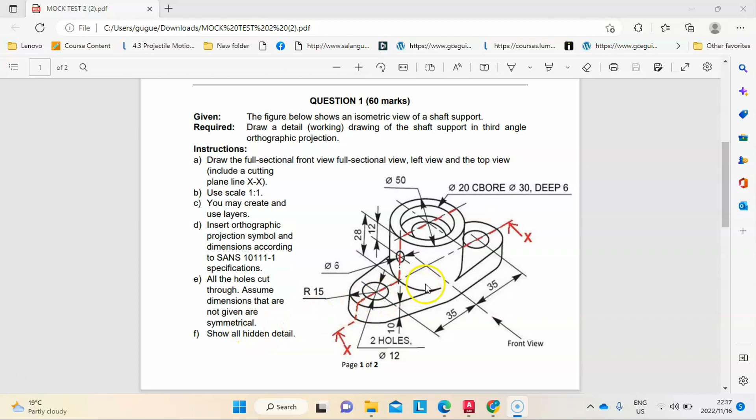Show all hidden details. So this is the question, guys. I want to put this to third angle orthographic, and I'm going to start by drawing the full section of the front view. Remember, when we draw a full section, we remove this front part here and then view what's remaining.

If we were to cut with a knife, an axe, or a saw, where we have material we would see a cut. Where we have a circle, we have an empty space, we have air basically, so we won't have a cut. Same on the other side, we only see cuts on the sides of those circles because that's where we actually have material. Where we have holes, we don't have material. Even there, it's the same.

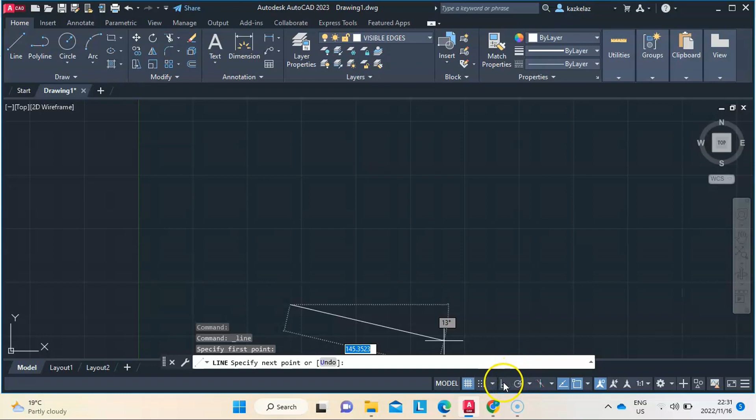So yeah, let's get to it. I hope you are looking at the drawing. I'm going to set this to orthogonal restriction, which allows me to draw lines that are only horizontal and vertical, nothing else. So here I'll put it 25. I'll explain why once this part is complete. Here I'll put it 28.

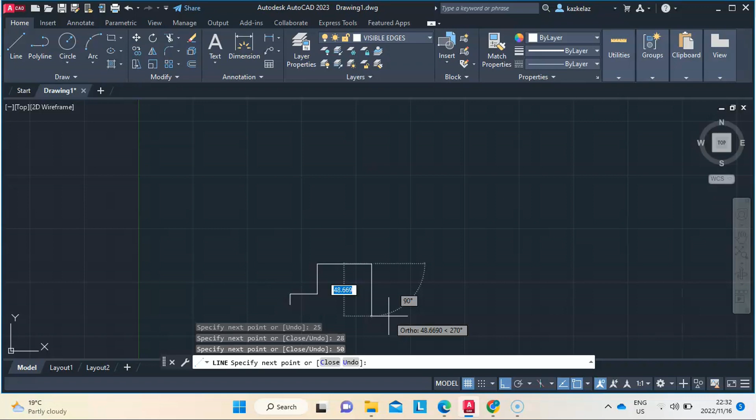Here I'll put 50, I'm sure you know why we have a 50 there, that's the diameter of the big circle. Then we have a 28, then we have a 25, and then we have a 10. And then you can see that this will be 100.

So yeah, I put 25 here because I know that the full length of the drawing is 100. Let's just verify that, guys, let's just verify that part. I just want to make sure that is the same as the other side.

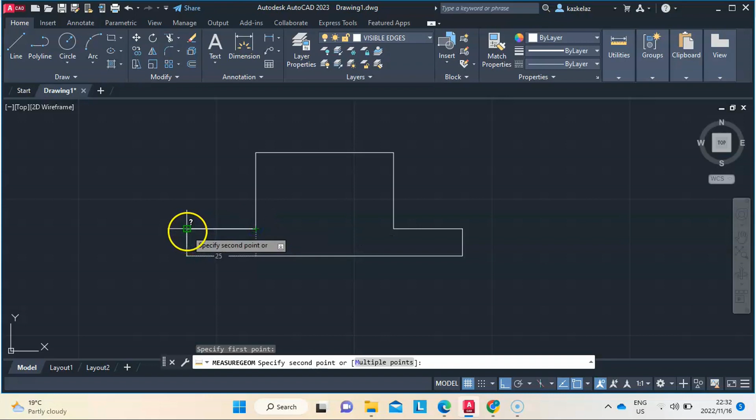Okay, so I put a 25 here and a 25 there because I know this is a 50, so I need a 25 on that side and a 25 on that side to make 100. So that's the reason.

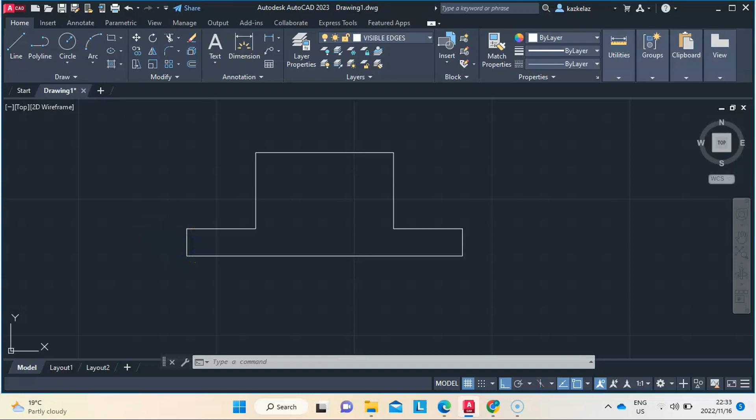I also know that from this point I can offset that line by 9 millimeters. Why? That's the first edge of the circle.

Wait and see. I'm saying this is one of the edges of those holes that we have here, the edge that is closer to the outer edge of the drawing. So I put it at 9 because I know that from that edge to the center, it's 15.

Since we have that arc with radius 15, it shares the same center with these holes, I have to subtract the radius of this circle, which is 6 millimeters, for me to get to this edge. And I have to go from this edge.

I know they're separated by 12 because two points that are opposite to each other on the circumference of a circle, if they can be joined by a line passing through the center, that length is equal to the diameter. So that's what I just used there.

And then we can go to annotate, go to center line, select first line, select second line. You see you have your center line there.

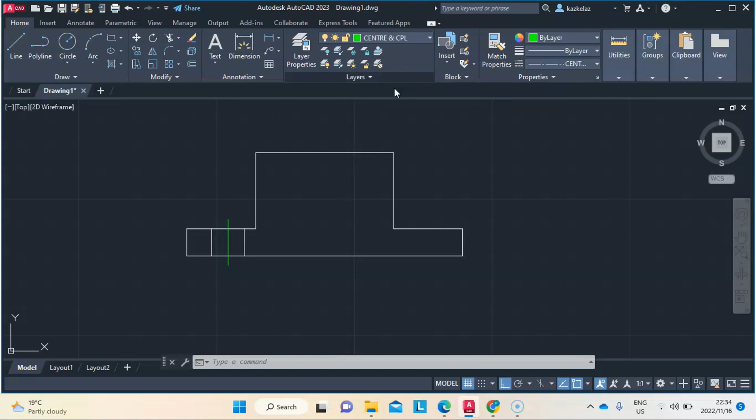Let's change its color. We go and select the layer that we created for that. Then right click, go to properties, then go to line type scale and change it maybe to 0.5, because we can see that it was appearing as if it's a solid line.

It's actually supposed to appear like that because that's a center line. So when you create your layers, you have to choose your line type as a center line. There are many center lines: center times 5, center 2, center times 2, center. You can choose whichever one you want.

So I don't need to draw this twice. I can just mirror it to the other side. Mirror line passes through the center of those circles.

And then I also know that from the top, I need to go down by how much? Let's start with this part. Once it says endpoint, we start dragging our mouse without clicking. We type 10.

We know this 10, we know where it's coming from - the distance between the outer circle and the one that's just inside. Then we go down by a depth of 6. Then we go to that side by 5 millimeters. Then we go down to the bottom of the drawing.

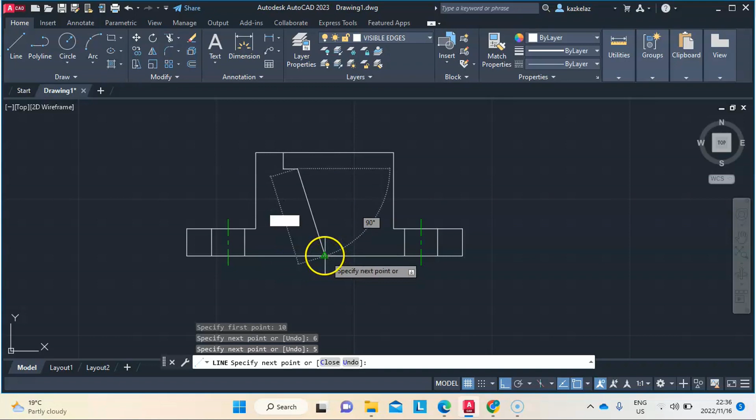Let's do that. And then here we can select that there, mirror it. We don't need to draw it again, so mirror it to that side. Erase source objects, we say no.

And then let's complete this part here. After completing that part, let's join this here, and that. Just type join out of nowhere in your AutoCAD, and you'll see that it's now one line.

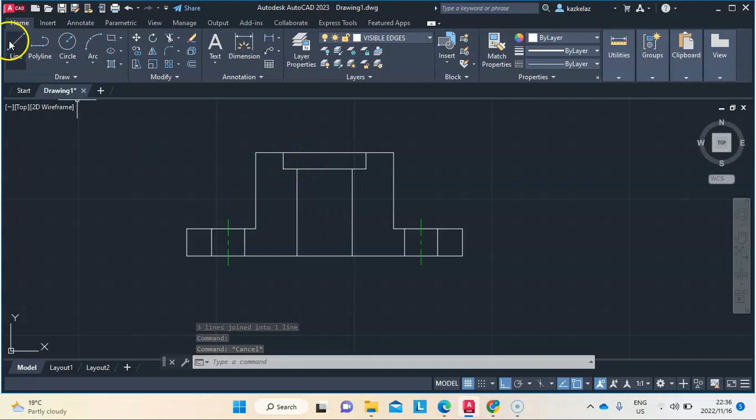So you have something like this here. We also know that from the top, we need to move by 12 to get to the center of that small circle that's somewhere there. But let's move by 9 because we know its radius is 3.

So we want the first edge. So we know it's 9 from the top, since the center is 12 from the top. And we'll have something like that.

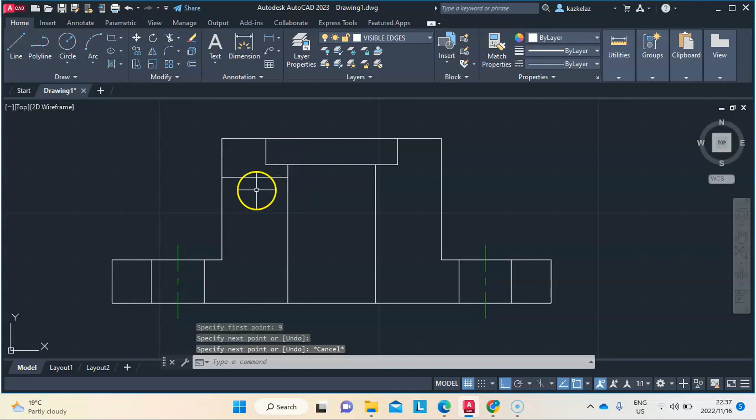Then let's offset that line by 6 millimeters, the diameter of that small circle. And we'll have something like this.

Let's now put its center line. So annotate, center line, select first line, select second line. We have something like that.

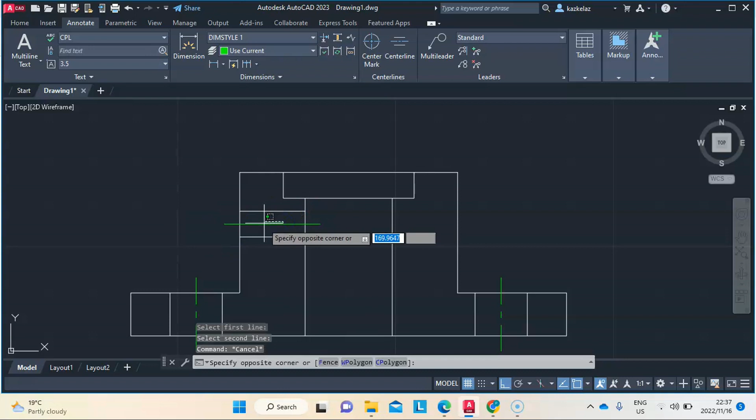Then what we can do from here is select that line, go to properties, go to line type scale, change it to 0.5, enter, and we have something like this. So now, I think that's it.

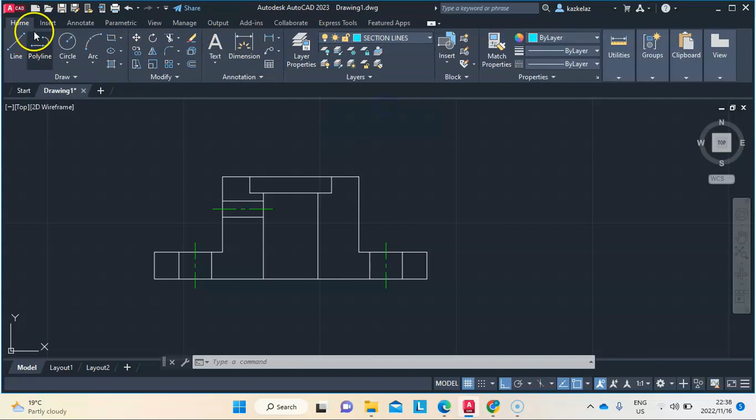What we now need to do is hatch that - go and select the hatch layer, the section lines layer. Then we go and select a suitable hatch pattern.

For full sectional views of machine components, I normally prefer using this one. I also recommend this one here, it's called ANSI 31. That's the one that I recommend. So you're going to have something like this here.

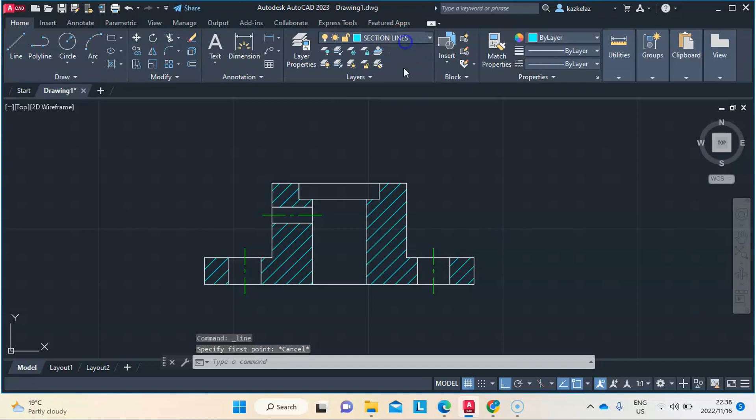Something like this, right? So after putting that, you also need a center line there. Let me show you guys, you need a center line there. So let me go down by 5 millimeters, and then there maybe by 50.

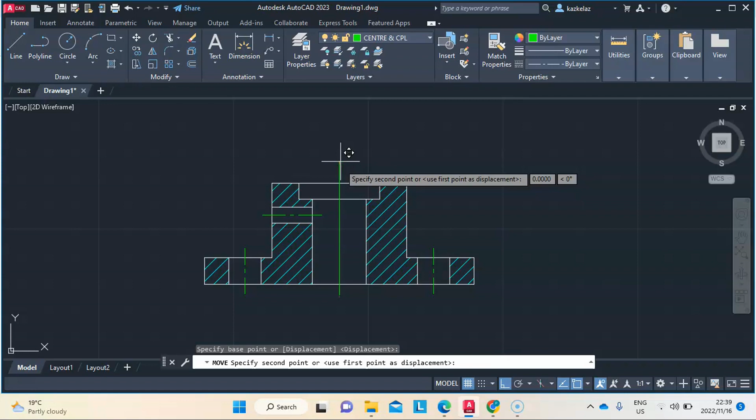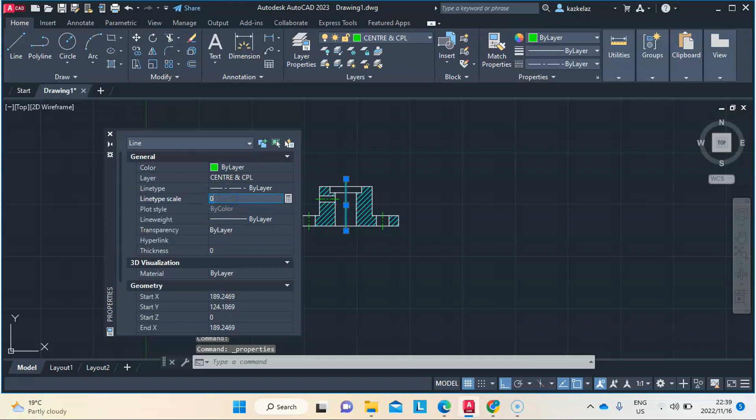Let's keep it where it is, but change its properties. Let's change its line type scale to 0.5. Okay, it doesn't change, so let's change it to something else, maybe 0.3. Yeah, I think that worked fine, so we have something like this.

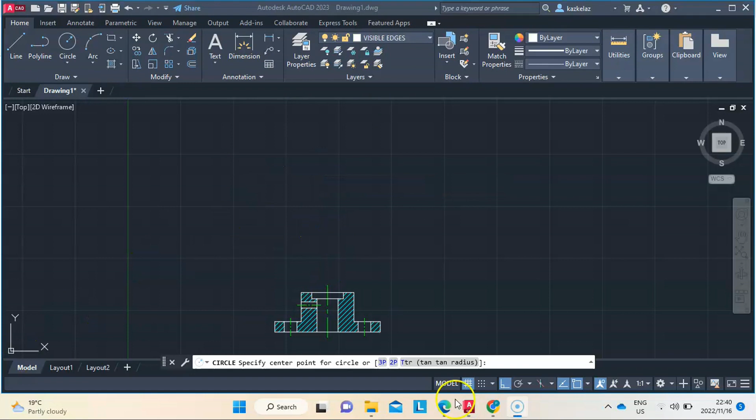After drawing that, let's go ahead and draw the top view. For the top view, we know we're going to have a circle. I've selected the visible edges layer because I know my circles are going to be appearing, since we're going to be seeing them from the top view.

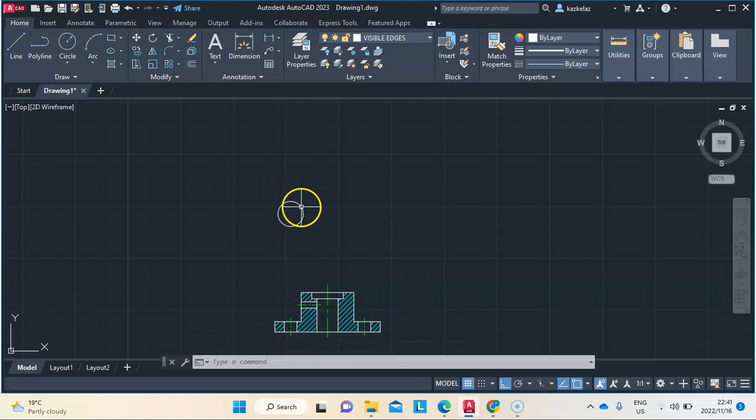Let's move up by maybe 100, and then from there, the small circle is 12 millimeters, and I know I have another one on the other side. So I'm going to mirror it about the center point. No, this isn't correct - the diameter is 12, the radius is 6.

So I'll move by 100, with a radius of 6. Then I'll mirror about that point, not erasing source objects. Then I select the circle again, then select that, and put this circle for the arc. Now I want to put the big circle that's in the center.

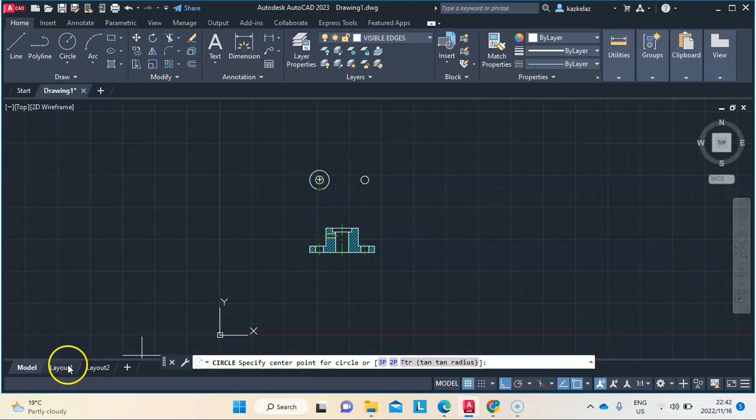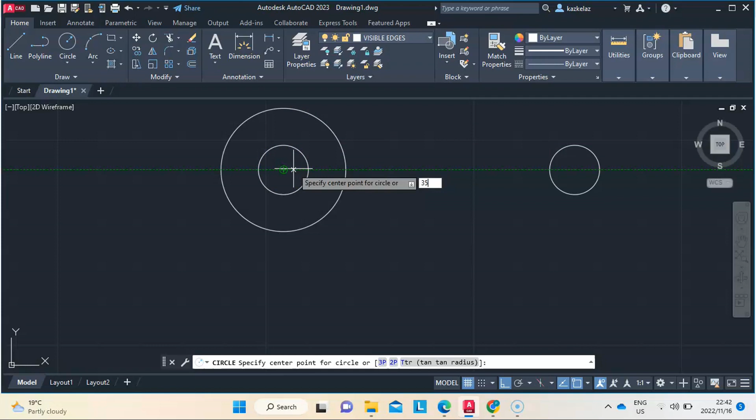I know it's 35 from that one there. So what I'm going to do is select that circle, go to the center, drag my mouse away, then type 35. Then I know I have a circle there with radius 25, and I have something like this. So now I need to draw tangents here.

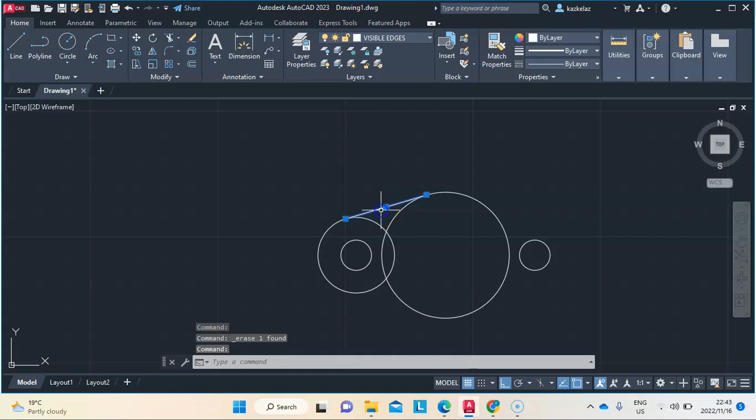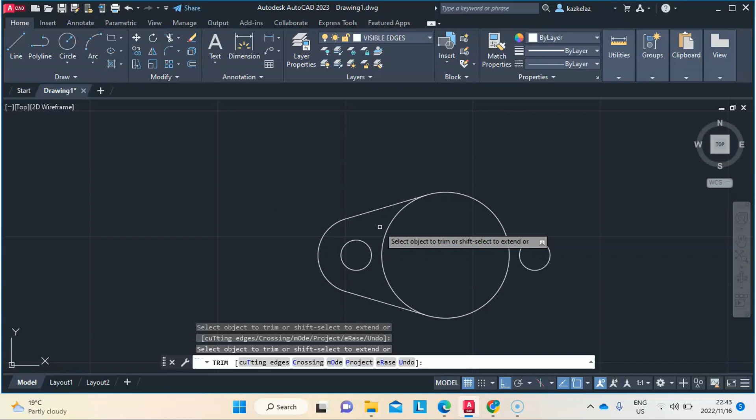It needs to be a tangent. We don't use quadrant, but quadrant will just help us have a start. So we erase the line we drew using quadrant. Let's mirror that one using the center, not erasing source objects. Then let's remove that part and that part. After this, we're going to copy that, mirror it about the midpoint, not erasing source objects. Then we have something like this here.

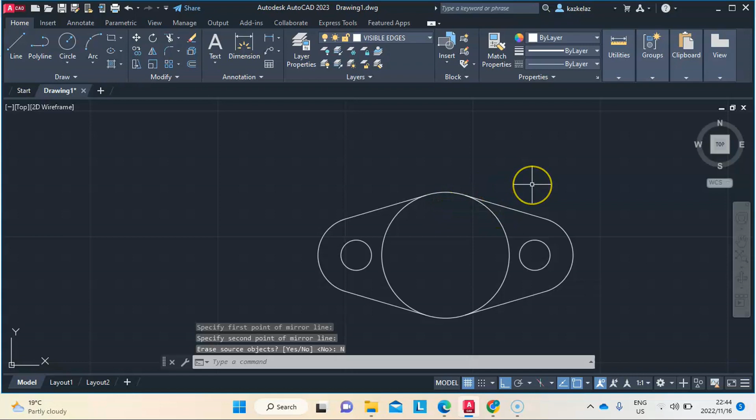Let's now offset this big circle to get the other circles that are inside. We know we have to offset by 10 to get the one just inside, and to get the other one we offset by 5. So we have something like this here.

After this, we have to draw that small circle we know is somewhere there, so we put maybe a line like this. Let's trim it there, then select it, and offset it to either side by 3 millimeters - 3 to that side and 3 to that side - then erase the one in the middle like this.

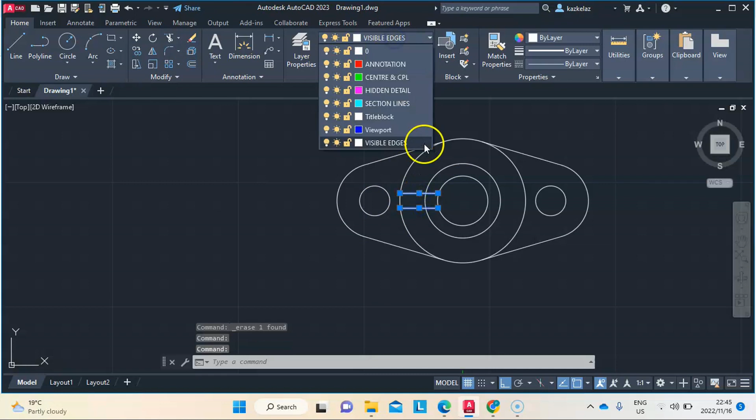So what after that? We know these are actually hidden lines - we see them as hidden lines from that view. So we have something like this here.

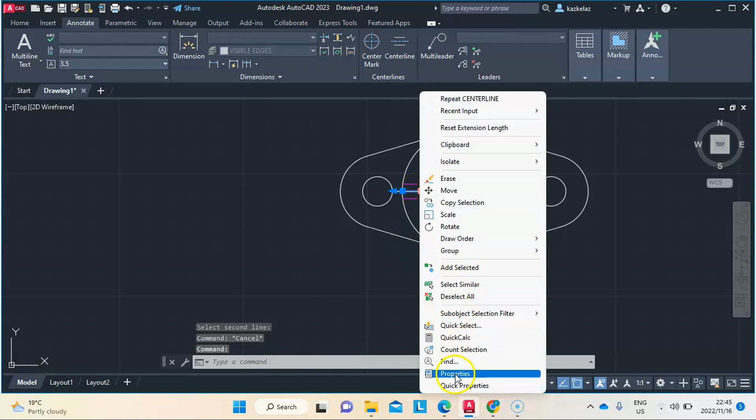What we can do is put a center line: first line, second line, and we have our center line. Then we can change its properties - line type scale 0.5, yeah that worked. We change its layer to that, so we'll have something like this.

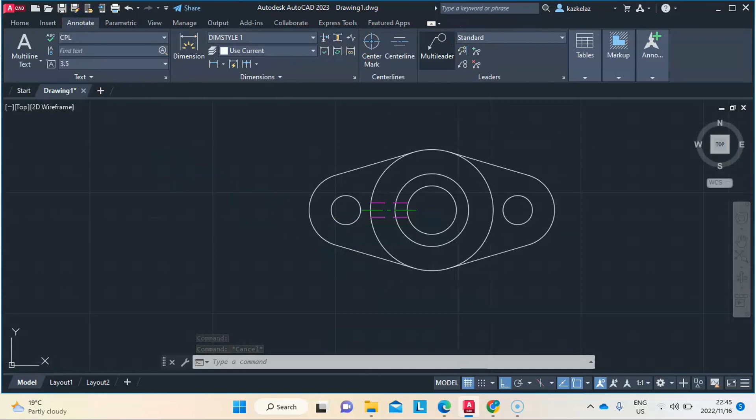We also need a center mark for that, and that. So we'll have something like this, but we can then change their layer to that, and we have something like this here.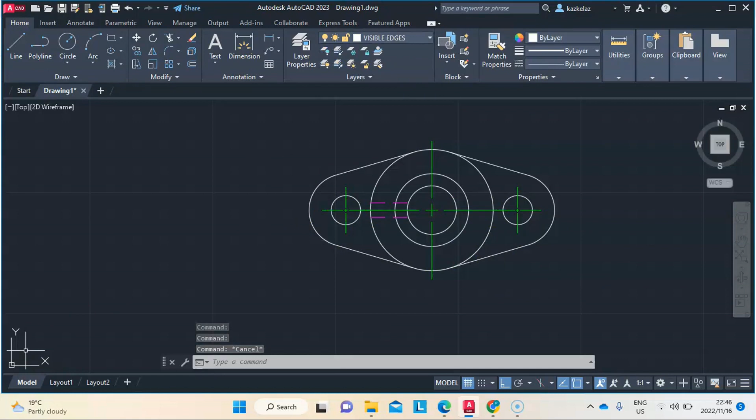Okay, so from here we're drawing the left view. What we do is connect that part with that part. What I'm drawing is this curved part, the line below this one - this one is from the top view. So I'm drawing the one with this edge we see here, the one at the bottom basically.

What I'm going to do is offset that one there by a distance of 10 millimeters to get the one at the top, at that corner. After that, I'm going to draw - remember, these circles, if viewed from the left view, appear as one circle because they're in line. So I'm going to the midpoint, that's where that small circle is. We see it from the midpoint, but as a hidden detail.

So what we need to do is move this line here by 6 millimeters, that's the radius of that circle. So I've moved it from where the center is supposed to be to where we have our circumference. Now I'm going to offset it by 12 this time, because I want the other one to be a diameter away. So I get it there.

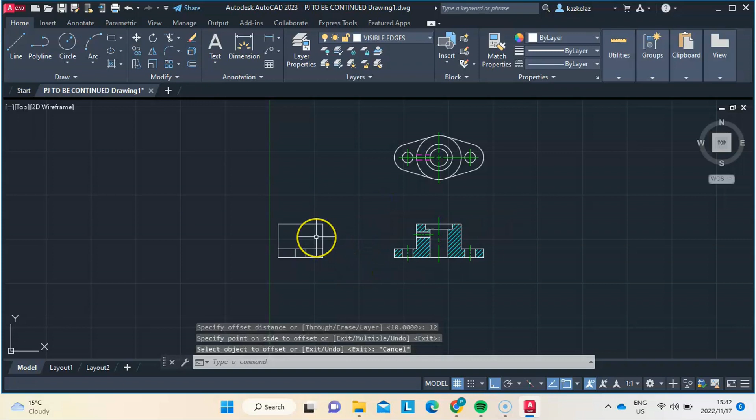So now what I'm going to do is go to annotate, then select center line, then select that line, select second line, then I have that there. I now need to change its properties, change its layer to the center line layer which I've created, then change its line type scale so it appears as a center line. That's very important, otherwise it will be seen as a hidden line.

So once that appears, go there. It says 0.5. Then I check if that's okay. Yeah, that's okay, so we'll have something like this here.

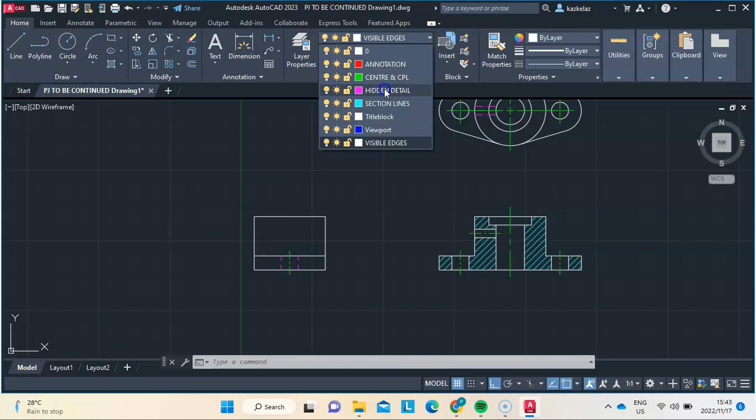But that line and that line will appear as what? As hidden lines. So I need to change them to the hidden layer, right? So I need to change that to the hidden layer, which is that one there, and I'll have something like this here. After that, you don't need to draw this thing, you know it's going to appear here and pass through the midpoint, but no need for redrawing it.

You just go there, copy it like this. So when you're in a test or whatever you'll be writing, for you not to waste your time, just need to do things smartly. So let's copy that, let's copy it using the center. You can see that it's appearing like that. Then we'll do that.

After that, what do we need to do? We need to change it, change it to that layer there, right? So we're going to have something like this.

So is there anything else that we might be leaving? Yes, this circle here, it also appears there as hidden lines. There, since it's a sectional view, we see it as solid lines like that because it has been cut. Imagine a cup that has been cut in the middle like this, you will see those cut parts. Yeah, so it's the same thing here.

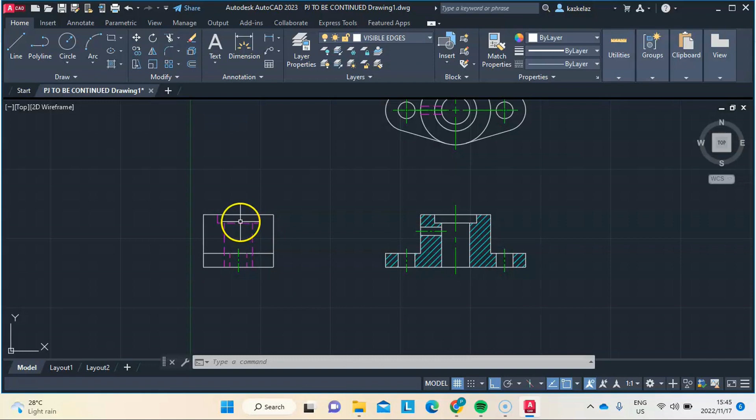So from here, what I'm going to do is draw that small circle. I know that from there, I need to go down by 12 to get to its center. Then its radius is 3. Then that's the circle right there.

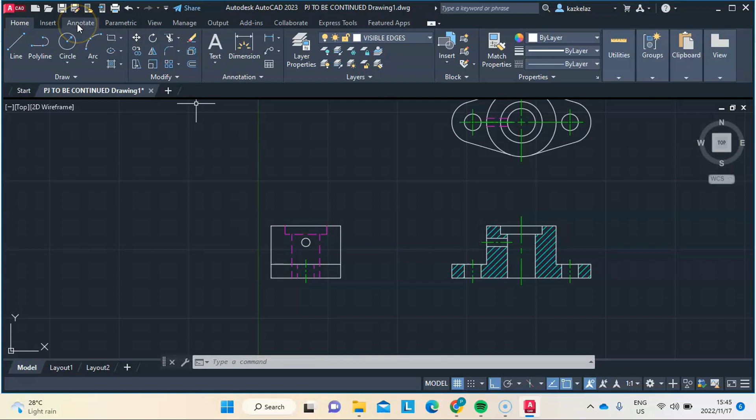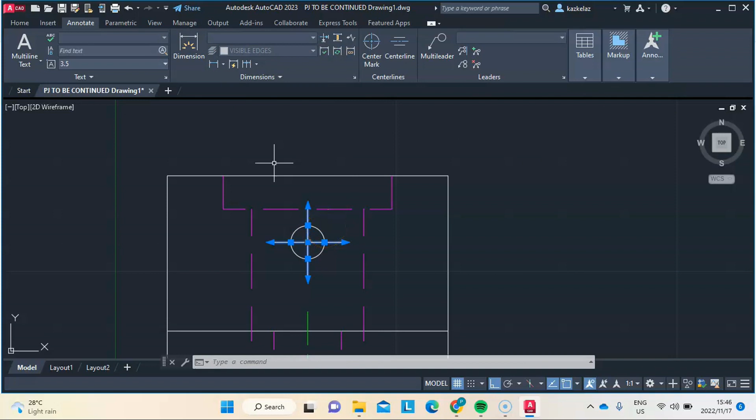So now what I need to do is go to annotate, go to center mark, select that circle, and you're going to have something like that there. Then you select that, and then you change its properties. Let's change the line type scale to maybe 0.2. Yeah, it's gonna appear like that.

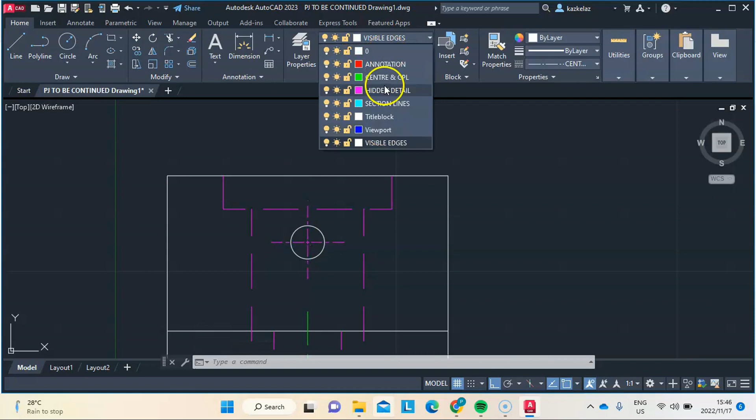Then we also change what? Yeah, let's change that layer. Then we see it like that. Now we just need to change that layer to CENTRE & CPL.

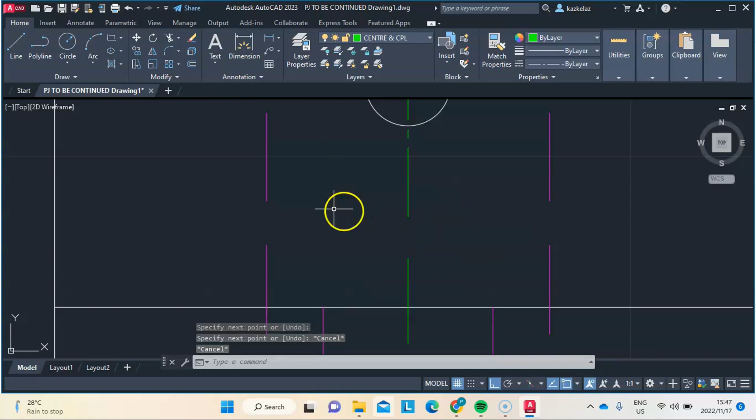Then maybe we can put some small parts here. So here's how we're going to do it. We're going to start from there, and maybe we might need to just extend this one first, maybe up to there. And then after that we put the small one. We have to make sure it's in line, so that's why I started from there. So we have something like this here.

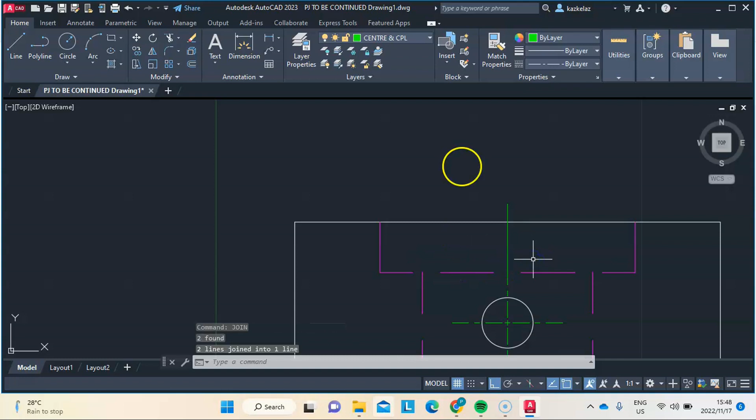So after that, we also need to do the same here. So we need to maybe do that, and we have something like that there. So that's basically what we need to do. So what do we have now? I think we just need to join. Okay, yeah, then we have something like this here.

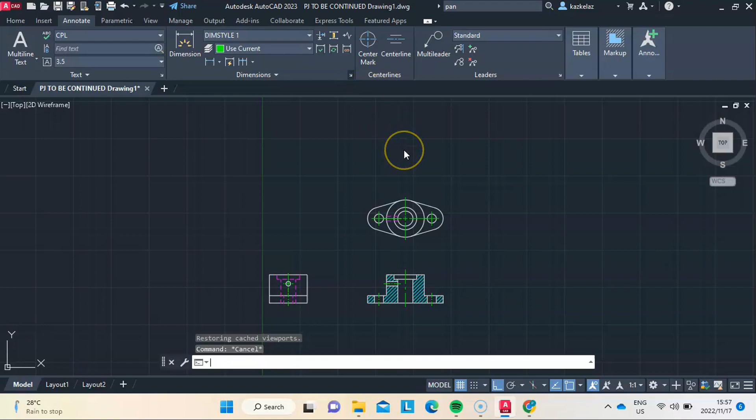So okay, from here what you need to do is dimension. So I'm gonna show you guys how to set up dimensions, what you need to make sure is on, and what you need to just leave as it is.

Okay, so I've already set up my dimensions. I've created this one called dim style one. What I did is I started with ISO 25, then I said new, then it started with a copy of ISO 25. So then here I'm just gonna modify it, but you should go and start with the copy of ISO 25. Let's start here on lines.

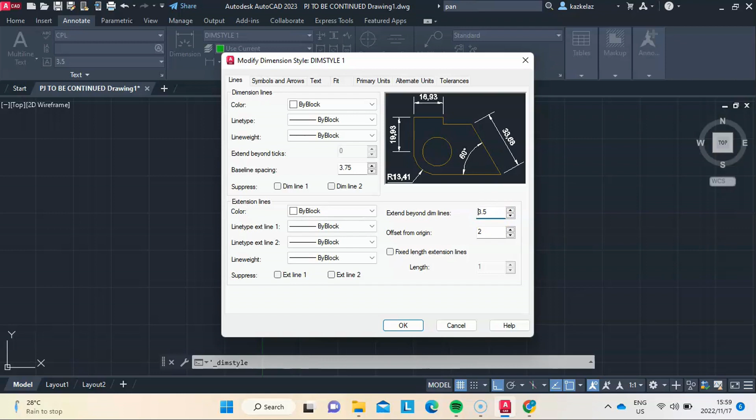So on lines, you need to make sure here on extend beyond dim lines. What this means is I want you to check what happens. If you type, let's say 1, for extension beyond dim lines, you see that part has changed, right? It's now smaller. That's why I prefer 3.5, because it's close to what I would want it to look like on manual drawing. You are drawing on a computer, but you want your drawing to appear as it appears in manual drawing, because if you are to print it, it has to appear like it was drawn manually, but it was drawn using a computer.

The other thing you need to change is where it says offset from origin. I want you to check what happens here. If I put it on 0, check what happens - you see that it's attached to the drawing. You wouldn't want your dimension lines to appear as if they are attached to the drawing, because they will look like they are part of the drawing. So you need to leave a small gap there. Normally use 2 millimeters, so you will have something like that, which is perfect.

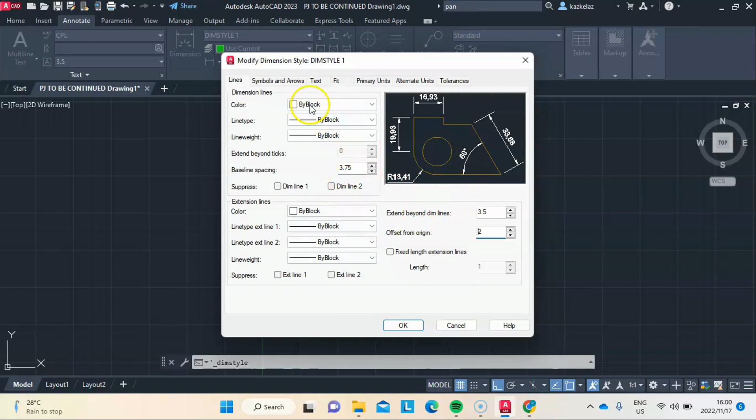The other thing you need to change - I think here all is well. Let's go to symbols and arrows. You need to change your arrow size to 3. By default, I think it's very small - I think it's 2.5. So you need to put it on 3 millimeters.

Then you also need to do, where it says center marks, put it on none. Because if it's not on none, if you say mark, you'll see that you have that dot appear. So if I do this, it disappears.

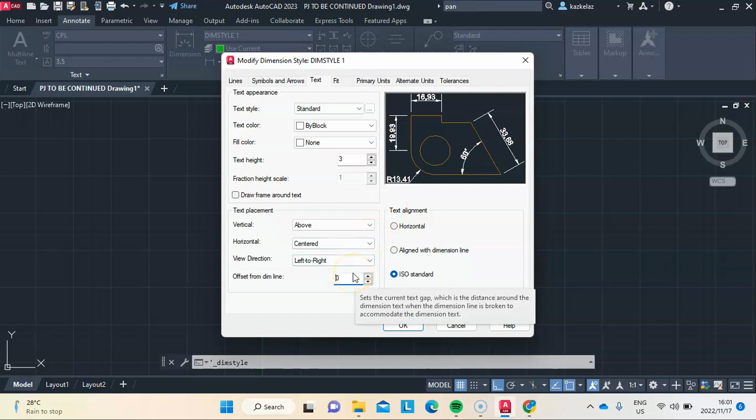The other thing you need to make sure you change is your offset from dim line - that's just for the text. Your offset from dimension line - your text should not sit on the dimension line like that. That's why I prefer putting 1.5, and you can see that it's away from the dimension line.

Then let's go to fit. On fit, you need to make sure here it's unticked, because if it's ticked, you're going to have something like that. So it looks neater when it's like this - just leave it like this. This is for this arc here, so it looks neater when it's like this.

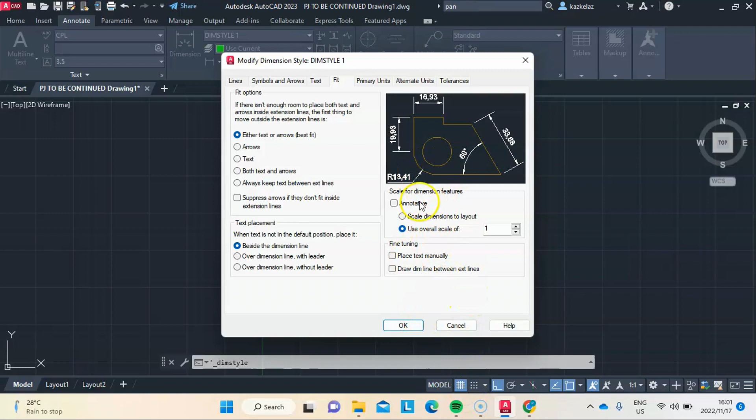On primary units, I prefer leaving it as it is, 0.00, because it tells you when you have made a mistake. Imagine when you fail to click on a certain corner and you miss that corner - your dimension is going to be different. But if it's rounded off, then it will tell you that it's correct. That's why I prefer leaving it like that.

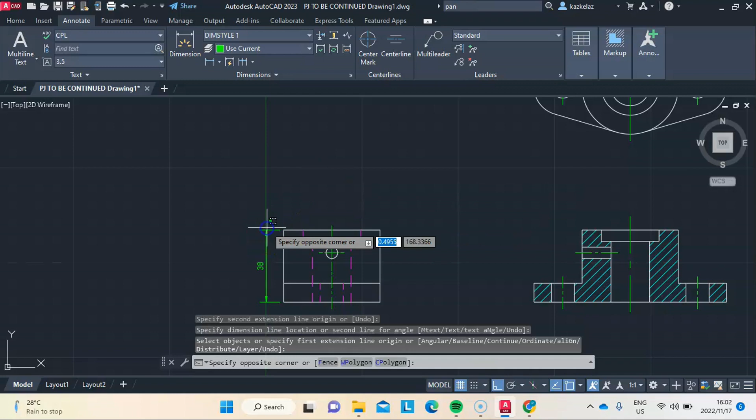That being said, for how to dimension, I'll do one dimension for you guys, and then the rest you can try by yourselves - maybe 2 dimensions. Remember to select your annotation layer when you dimension. Maybe you want it to be something like this, but remember you need to select your annotation layer. So let me change this to annotation, and then I'll also change my layer there to annotation.

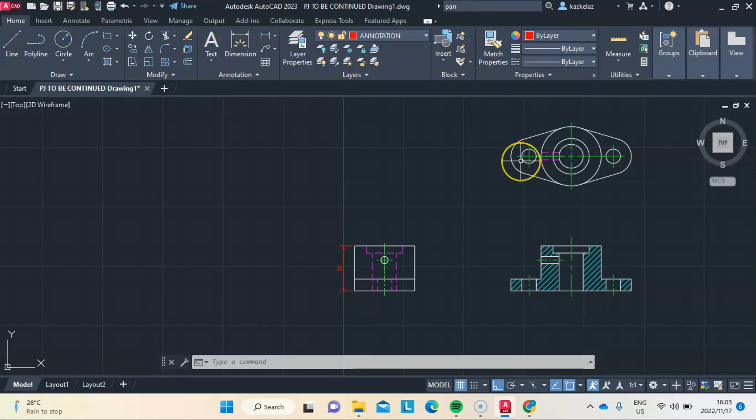I'm also going to do dimensioning of an arc. I'll dimension that arc because I want to show you guys something you can do, or maybe I can dimension those circles, so that you can see how it's done. I'm going to go to annotate, then to where I have dimensions there.

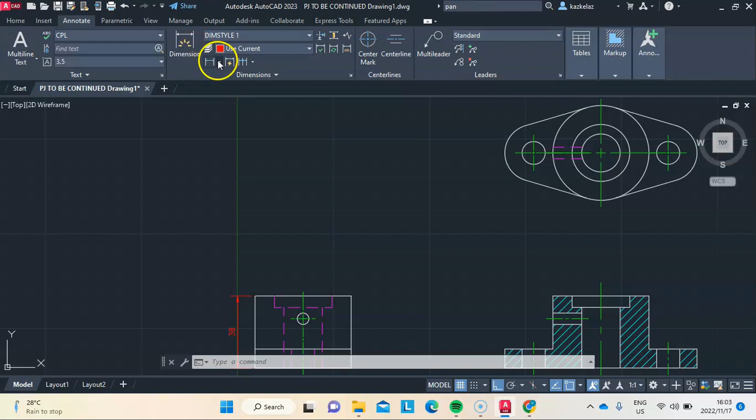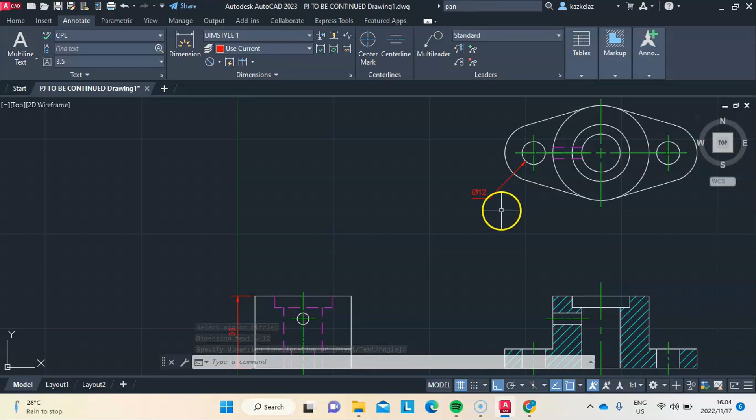Here it says linear. I can modify your dimension. So I can choose here to say let's say diameter. Let's choose diameter, select circle or arc. I'll select that. But here I need to mention that I have 2 circles - I don't need to dimension this one, I just need to dimension one, but I need to mention that. I'll select my dimension, then go to properties.

On properties, I'm going to go down to where it says dim prefix and suffix. I'll look for dim, prefix, and suffix. There we go - where it says prefix, I want to say 2 holes, then diameter symbol, I'm just going to put what?

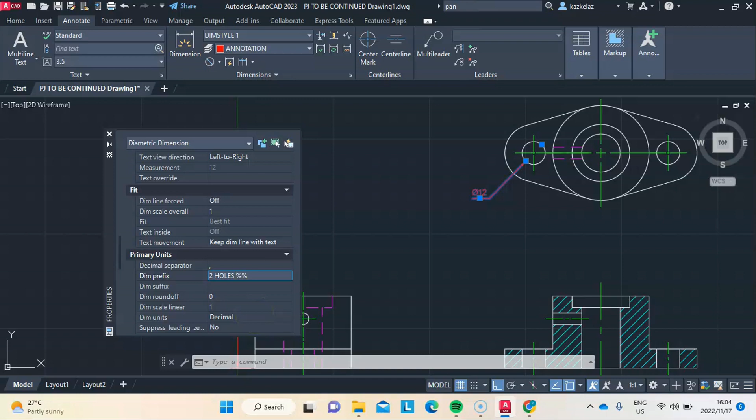Percent C, right? Then space. So it's 2 holes, percent C, space. Don't forget this space at the end - I put a space here. The reason for that is I want there to be a gap between my diameter symbol and my number representing my dimension. So that's how you do it.

So this just means I have those holes, 1 and 2. Now what I want to do is dimension this arc also for you. I want to dimension this arc, and I'll also explain how I put this section XX line, so that you can also try and put it by yourself. So I'll just explain it.

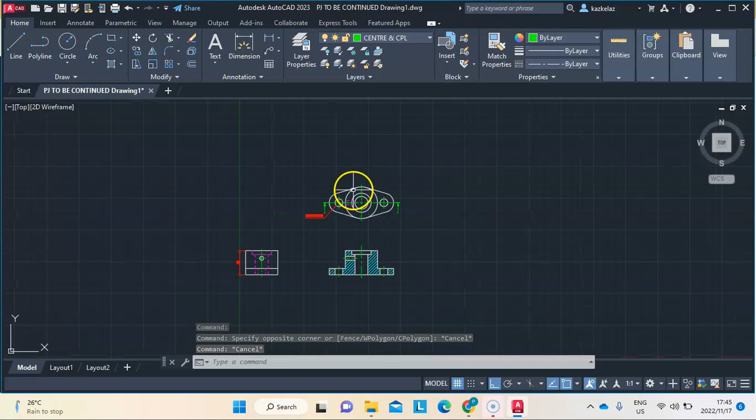Now what I want to do is dimension that arc. I'm going to go to annotate, then choose radius, and go to my arc. I know I have two arcs, but I'm just going to dimension one. So what I'm going to do is change there.

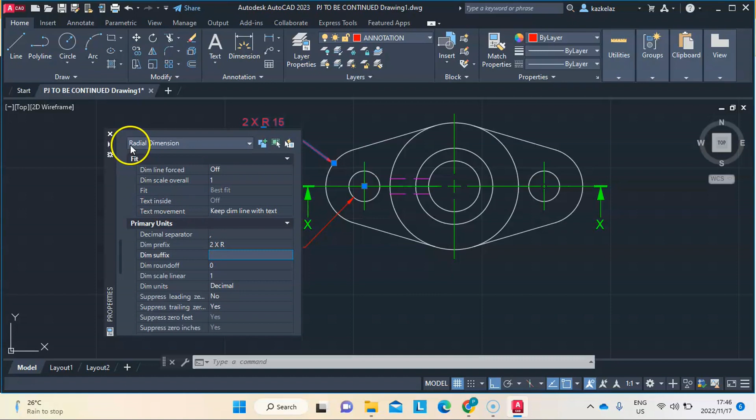I'm going to change there to annotation layer. After changing to annotation layer, I'm going to select that, and then go to properties for that dimension, and look for dim prefix and suffix, which is there, and then I'm going to say 2. For this one it's a bit different because it's a radius, so it's 2 times r, then space, then enter, and you're going to have something like that there. So this just means you have such arcs.

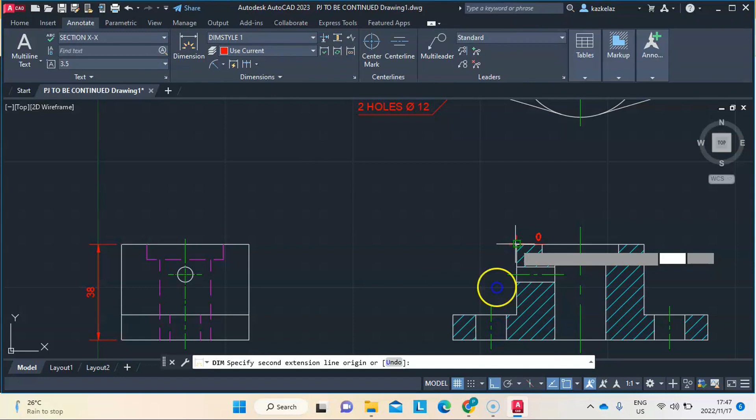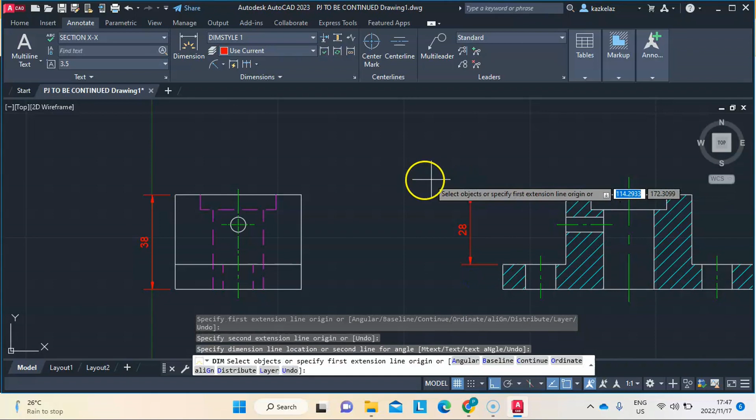Then what I'm going to do - there's also a dimension that I want to show you how you do it. It's this dimension here. You have to click there to avoid putting a dimension inside the drawing. We have to actually put it somewhere there, and then we do that. So we click on that point, then it's gonna appear like that the moment you drag it out. So you have something like that there.

So I had said I'm gonna show you how I put that section XX line. I'm going to go and select my layer for that, which is the CENTRE & CPL. Here's how I do it - I go and select polyline. You might notice that here I didn't draw it all the way to there; I just joined with the center lines that were already there. I just joined it - in fact only drew this part.

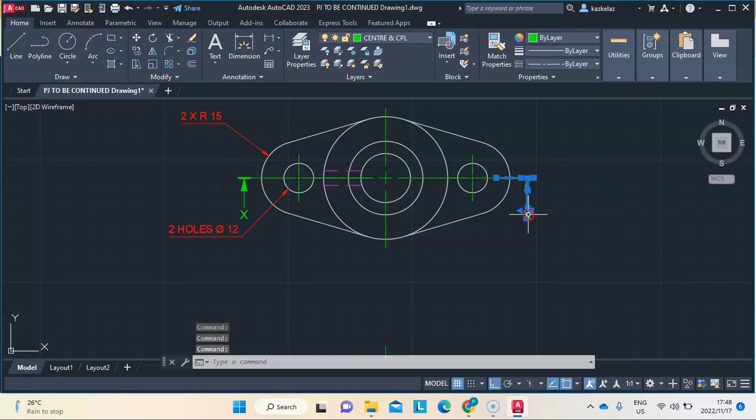This part here, because if you look at this side, I can actually erase this part. What I did was only draw this part here, and then I mirrored it to the other side. So I just went to mirror, then I mirrored it along the center, right? So I have something like that.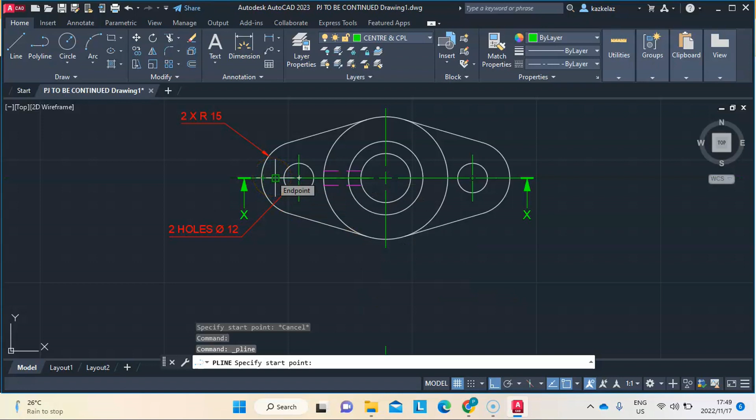So I'm just going to show you how to draw one side, and then you're going to try and draw the other side by yourself. So what I did is I selected polyline, and then I went to the midpoint of that center mark there. Then I did this, then extended it until I was somewhere there, which is outside the drawing. So it's like something like this here.

Then I clicked, and then I went to where it says width here. Then I clicked there, and said starting width 0.5, and then enter. For the ending width, it's also going to be 0.5, so I don't need to type it again, I just say enter. So I'll have something like that. Then I typed 5, because that's the length of that segment, with a width of 0.5.

After that I go back to polyline, and you can see that when I put my polyline, the midpoint is at the center. There is no - I cannot put it somewhere there because I don't know where that edge of the polyline is. So what I'll do is go to the midpoint. Once it says midpoint, I'll start moving away, then type 0.25, which is half of that polyline - basically taking me from the center to the edge. Then I'll say enter, so I'm now sure I'm starting at the edge.

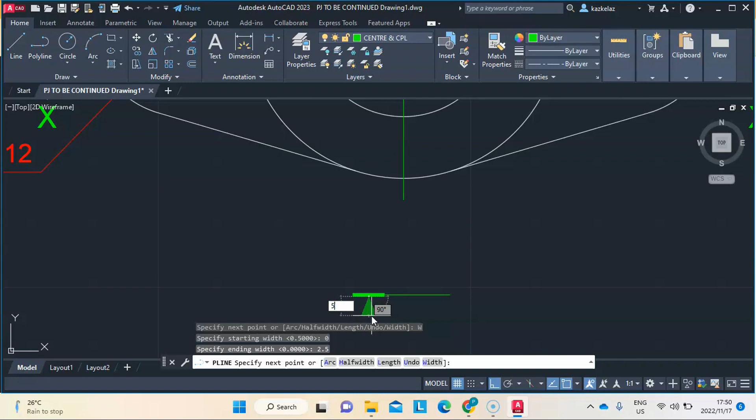I want an arrow there, so I'll go to width. Remember, an arrow starts with a point which is 0, and its width increases uniformly. So 0, enter. Then I'll say maybe 2.5 - I want the arrow size, its ending width, to be 2.5. Then I'll type maybe 5 millimeters, then enter, and I'll have something like that there. So now I want to go back to width, because I now want that tail of the arrow, which is a width of 0. So it's 0, enter, enter.

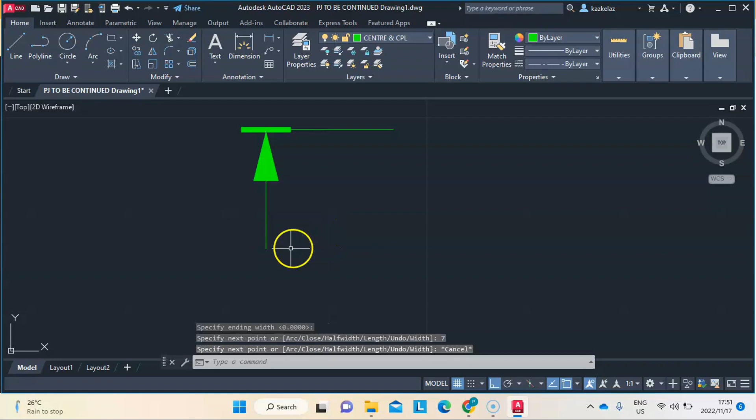Then you have something like that, then you say 7, maybe, and you're going to have something like this. So yeah, I had already set the text for the label of the full section XX and for the CPL, right?

So basically what I did is I started with standard. Let me show you. You go to standard, make sure it's blue like that, then say new. Let's say style 1. My text height, I want it to be 3.5. Don't click on annotative, don't select any annotative.

Basically what annotative does is it scales our text automatically. I don't recommend that because it confuses many people. Sometimes it's difficult to reverse things, so I think that's quite complicated.

So what you need to do is, if it's a drawing that fits on an A3 paper, like this one here, its dimensions are small. You can see its biggest dimension is 100 millimeters, about 10 centimeters. That fits on an A3 paper.

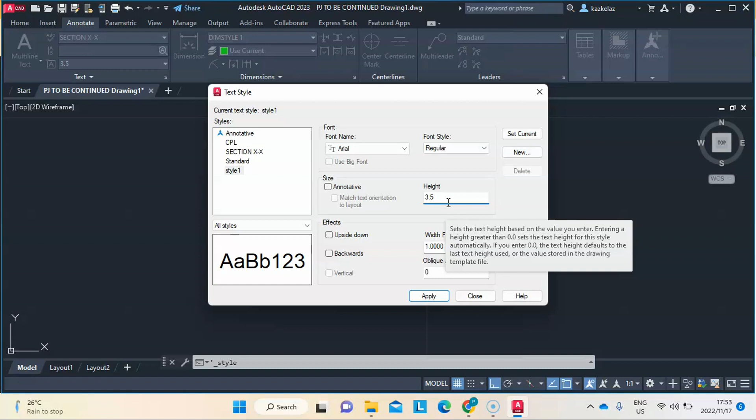But let's say you are drawing a plan of a building, and one of its dimensions is like 50,000 millimeters. That means you would need to make your text height maybe something like 2,000, so it will actually show when you change your scale, and the text height will also scale to the paper.

So yeah, that's what I recommend. That's how you create it. Then you just say enter, then close. That's basically how you do it.

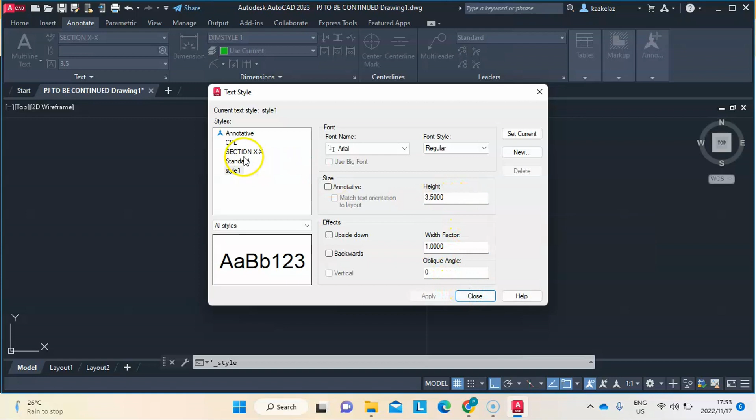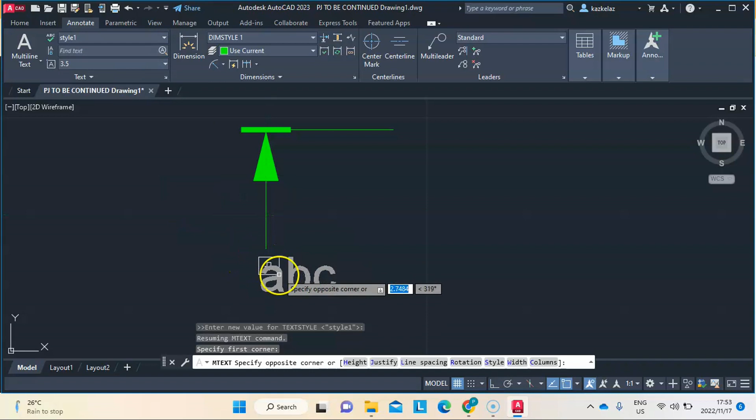But myself, I've created that for the cutting plane line. I'm going to say close, then go there. I can go and select CPL, go there, do this, then just type X, enter. I can move it so that it goes somewhere there.

Then after that, that's when you can actually mirror this to the other side, by doing this, and you're going to have something like that. So that's very easy to put. I hope you guys understood it.

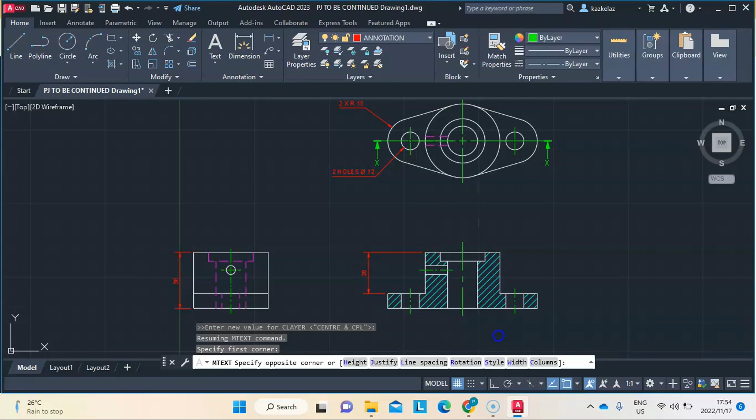So yeah, here I also need to put text to label my drawing, to label that drawing there. I need text there. You only label one, not all of them. The one you label is section XX. But if it was just an orthographic projection, you'd have to label the left view, the top view, and the front view. This one is the full section of the front view, and it's section XX.

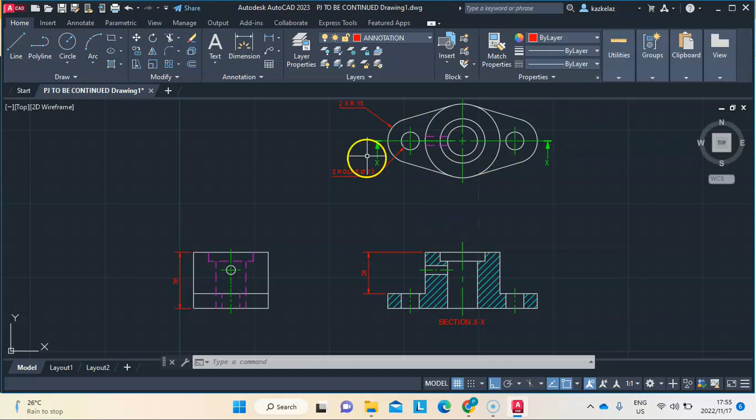So you put the section, the cutting plane line there, and here you put the section lines, the hatch basically. So that's what you do there.

So the other thing I'd like to show you is how you can represent the diameter of that big circle. Instead of representing it by following that procedure I showed you guys of going and saying diameter, you could do that, and it works. You could do that and go and do this. And remember to change the spacing here.

So if you want to change the spacing, you would go to properties and look for dim prefix and suffix. Then you say percent C, then space, then enter, and you see that it has changed.

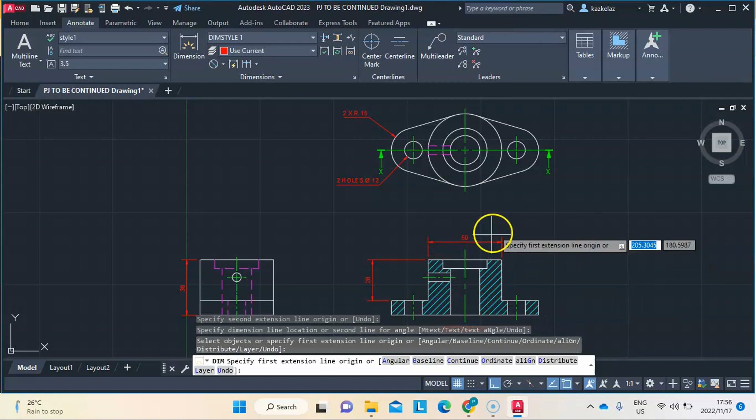So you could do that, but let's say you didn't want to put that one there. Maybe you wanted to instead put it there, to dimension that part instead. You would go and select that dimension, and say dim prefix, then go and say percent C, then enter.

Then you're going to have something like that. I mean space, then enter. So you're going to have something like that. So yeah, that's also fine.

So if it's a circle, you must remember to indicate that it's a circle, not a line. From this view, we see it as a line, but it's in fact a circle. So that's why we're putting that diameter symbol there.

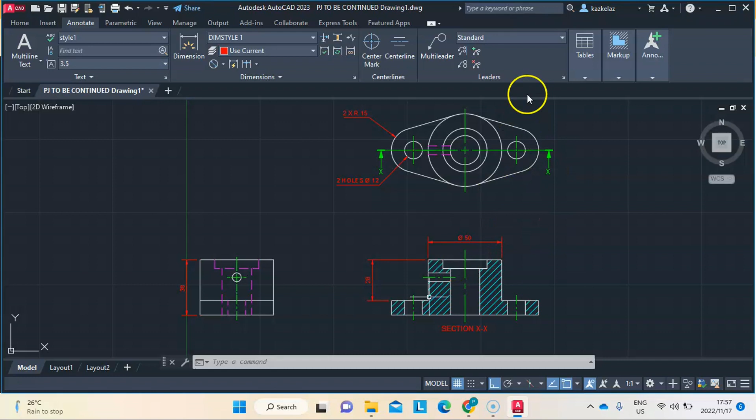So I think here we are done. I don't think there is anything else. So I'm going to end this video here.